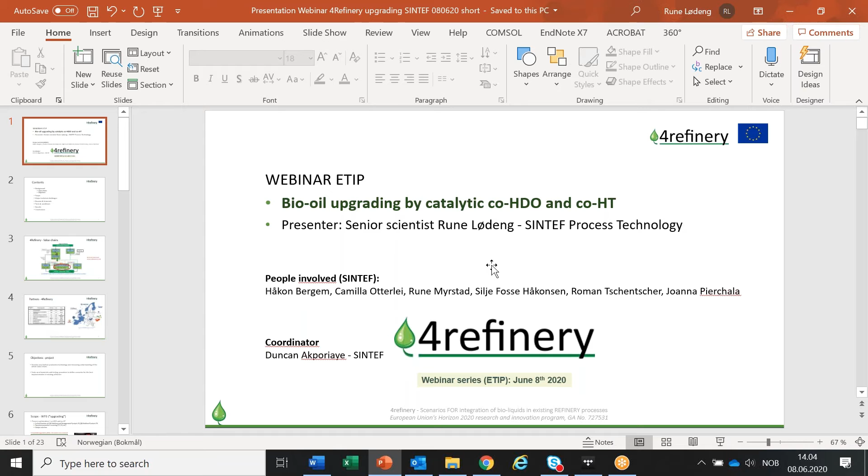The title is Bio-oil upgrading by co-HDO and co-HT. It is to some degree a technical presentation from work performed in the 4Refinery project, which is still ongoing. You see the list of people involved, and this project is coordinated by SINTEF and Duncan Akporiaye. First, a brief outline of the content: some background information, the value chains and project objectives, then the scope of the study, technical challenges, and then some experimental aspects, including results and conclusions.

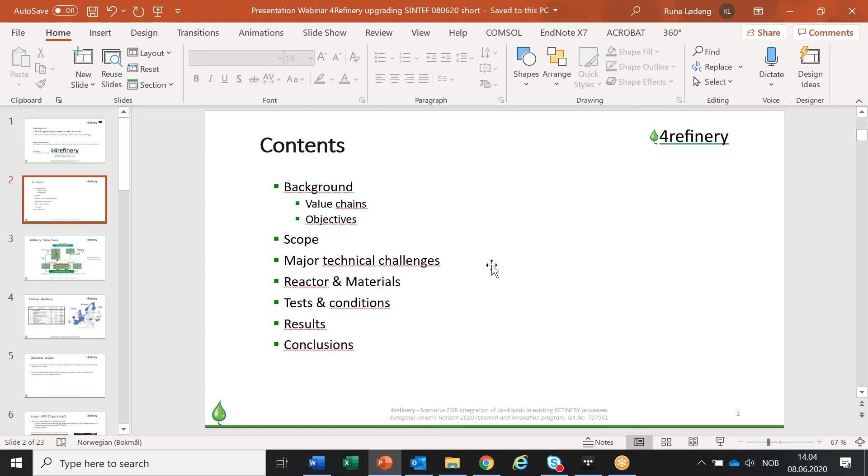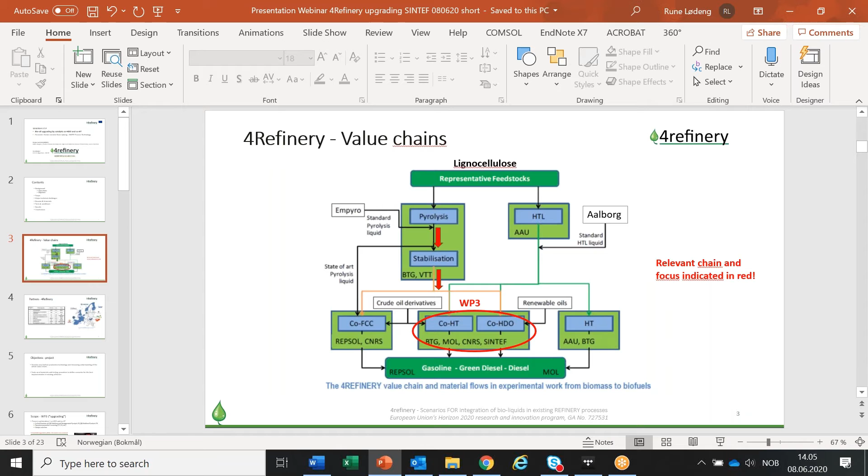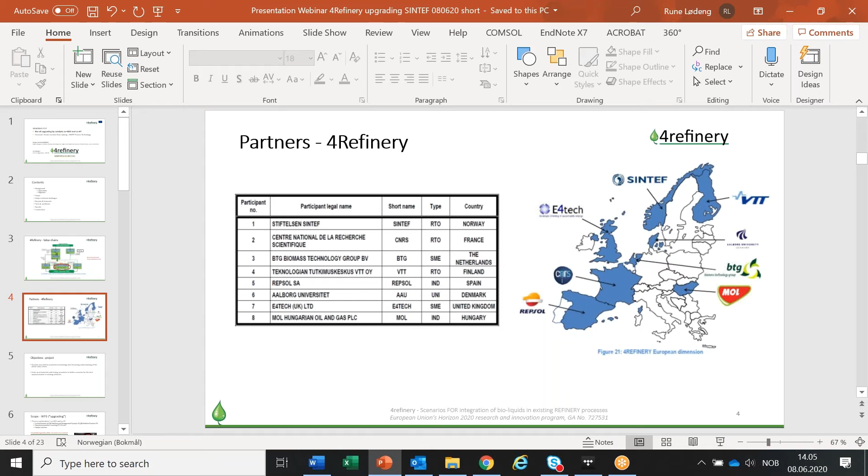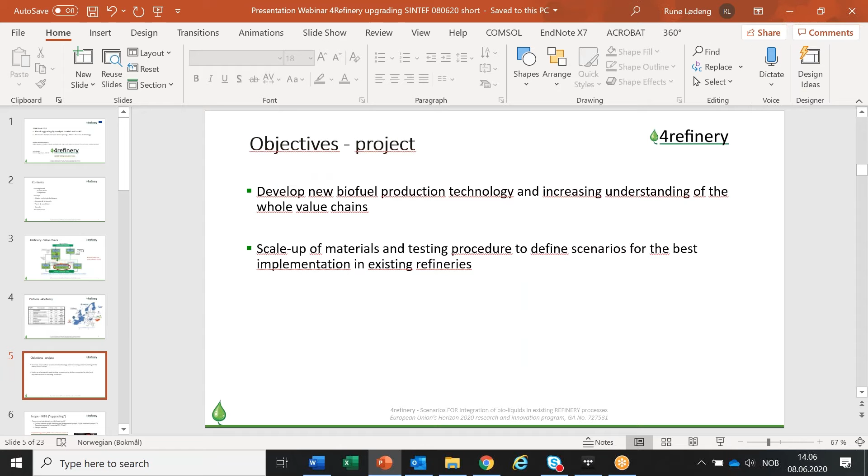Rune, I'm sorry to interrupt you. Could you please turn on the presentation mode, which has been asked by your participants? Yeah, great, thanks.

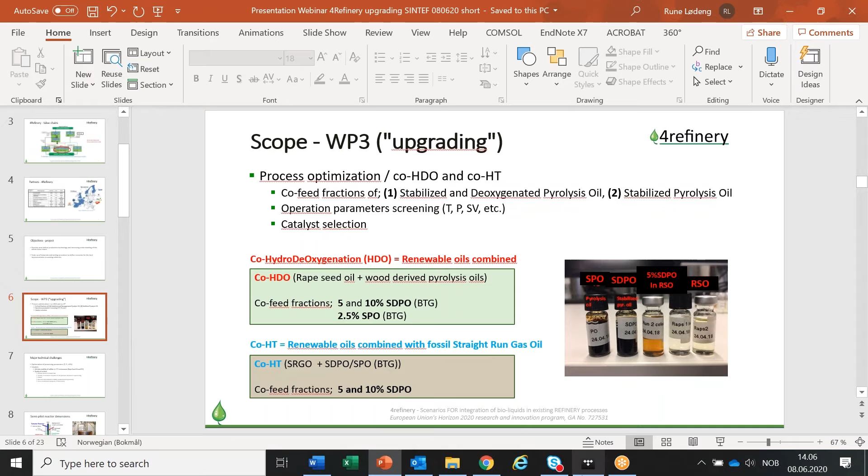The scope of WP3 is upgrading. It's about different aspects of process optimization, fractions of pyrolysis oil, and pyrolysis oil quality. It's about operating parameters, and it's about selecting the best catalyst.

In co-HDO, we study mixtures of renewable oils only: 5 and 10% stabilized and deoxygenated pyrolysis oil, and 2.5% stabilized pyrolysis oil in rapeseed oil. The stabilized and deoxygenated oil is high quality oil, while the stabilized-only oil is lower quality with higher oxygen content. In co-HT, we combine pyrolysis oil with fossil oils at the 5 and 10% levels of SDPO.

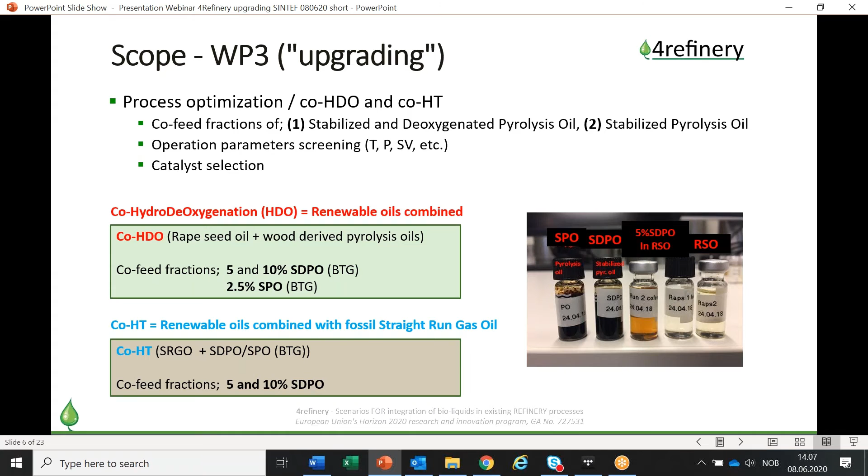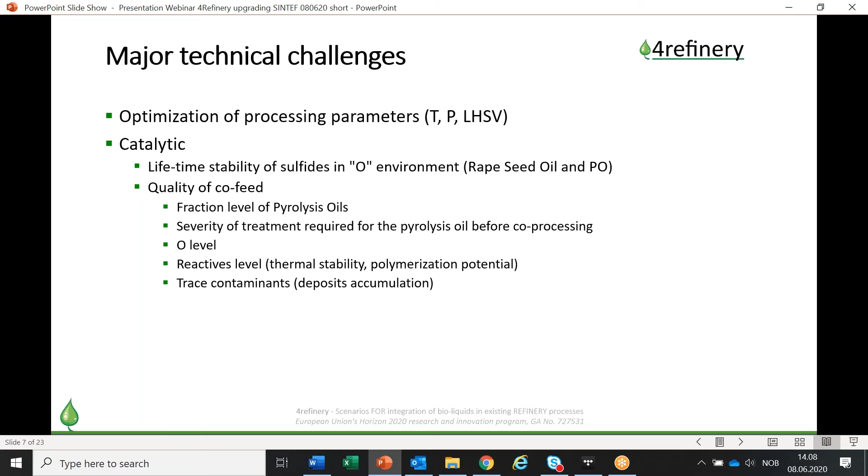The upgrading is studied in a semi-pilot fixed bed reactor. We have used full pellet catalysts in all tests. It is a 1-inch internal diameter reactor, 1 meter long. The catalyst bed is typically 20 centimeters long, and the catalyst is diluted with silicium carbide to handle the heat release better.

We have prepared and studied 2 different types of catalysts, the CoMo on alumina and the NiMo on alumina - conventional materials. I will show results obtained under the NiMo sulfide catalyst, since this had better stability over time than the CoMo. These catalysts are pretreated with dimethyl disulfide to activate them to the sulfide state, and this sulfur component is also added to the feed during the test to maintain the activity of the catalyst.

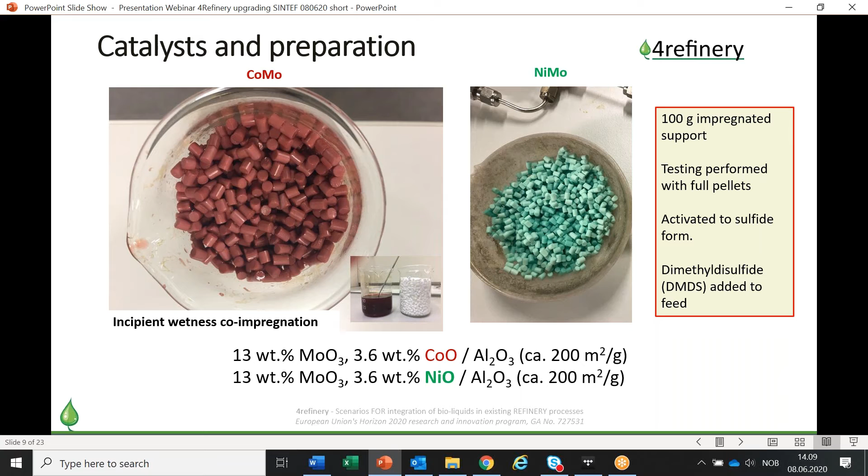Briefly on the analytical methods: we follow the gas composition by online gas chromatography. We calculate the hydrogen consumption. For the liquid products, we measure density, elements composition. We do a boiling point distribution, SIMDIST, and we also do chemical detailing by two-dimensional GCMS. In addition, we follow the temperature and the catalyst bed behavior.

The goal is production of middle distillates, with boiling points typically located between 150 and 360 degrees C. These graphs show the SIMDIST fingerprint of the feed oils. To the left, you see the fossil oils. They are largely inside the middle distillate range.

The renewable oils in the right figure have a small fraction below 150 degrees C and a 20% fraction above 360 degrees C. And you also see from the right figure that the SPO is heavier than the more treated SDPO.

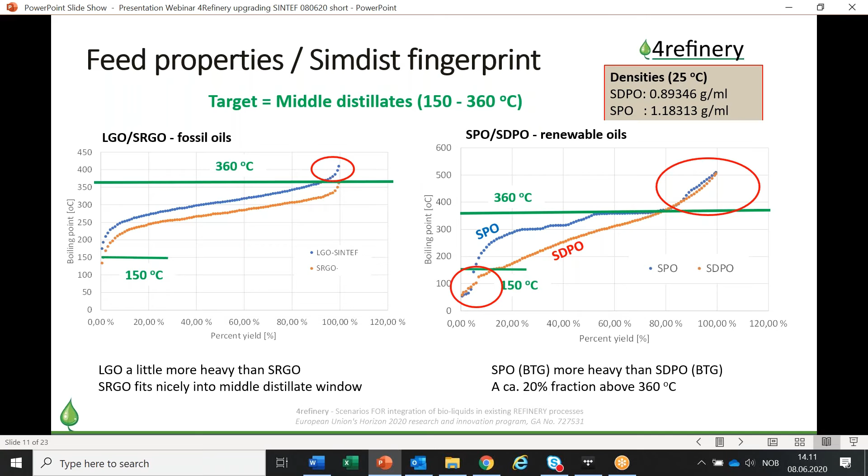A challenge for processing is the highly exothermal reaction. These profiles illustrate the difference of ordinary HDS, that is not so highly exothermal, compared to hydrodeoxygenation of rapeseed oil. Rapeseed oil contains 11 weight % oxygen, so it's a rather high heat release. The HDO reaction is fast, and when performed at high conversion, much heat is released. As a consequence, it is more difficult to control the reactor temperature in case of this high oxygen feedstock.

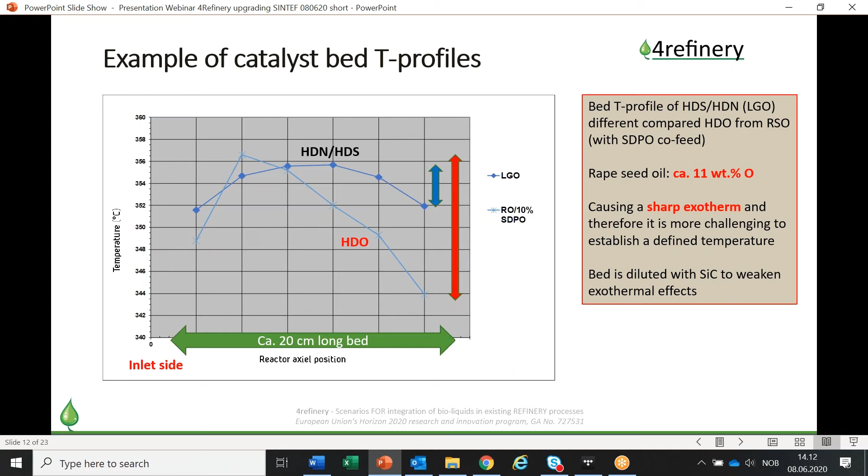Then some results. I'm not going into detail in this table, but each line refers to 1 day on stream, so you see it's approximately 16 days on stream. We start the test with a fossil oil period, LGO, as a reference to see that things work nicely. Then this is followed by multiple rapeseed oil periods with variations in temperature, pressure, and so on. Then we switch to the co-feed that you see in lines 13 and 14, and then thereafter back again to LGO and rapeseed oil.

The table shows via the density of the products obtained and via the remaining oxygen that the conditions give near complete HDO conversion between 99 and 100%. We also see via the HDS and HDN removal in these reference oil periods, that is the numbers in the red circles, that there is a slight activity decay over time, and that is one major challenge. The catalyst is not performing at the conventional level regarding lifetime stability. It's a slight decay to be observed over 16 days.

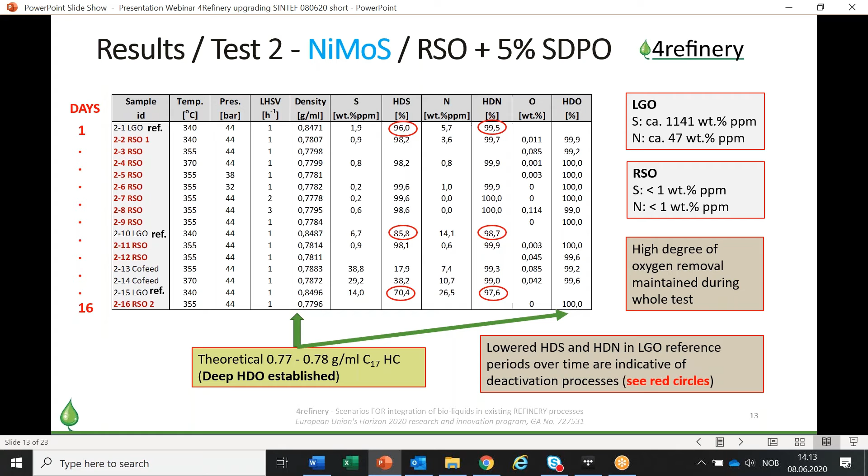Then light gases are formed. These are dominated, when you look at the red boxes, by propane and CO2 and carbon monoxide, but also other hydrocarbons. CO2 in this context is a loss. Carbon monoxide as well, but it is in addition a potential catalyst poison. C3 is value, and propane and the other hydrocarbons could be converted to, for example, hydrogen needed for the processing.

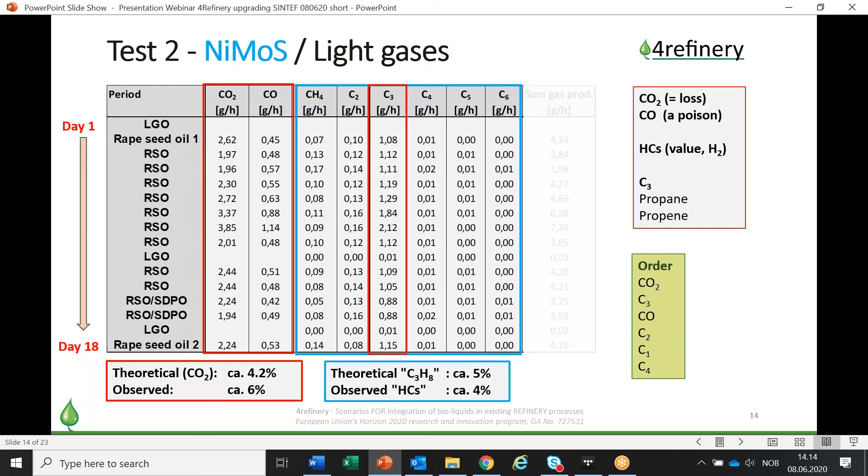The product liquid composition from rapeseed oil over time is shown here. This is dominated by linear C17 and C18 hydrocarbons, and these two constitute above 80% of the liquid. In addition, there is some C15 and also some C19 and higher. So the total carbon yield in this system is above 90%.

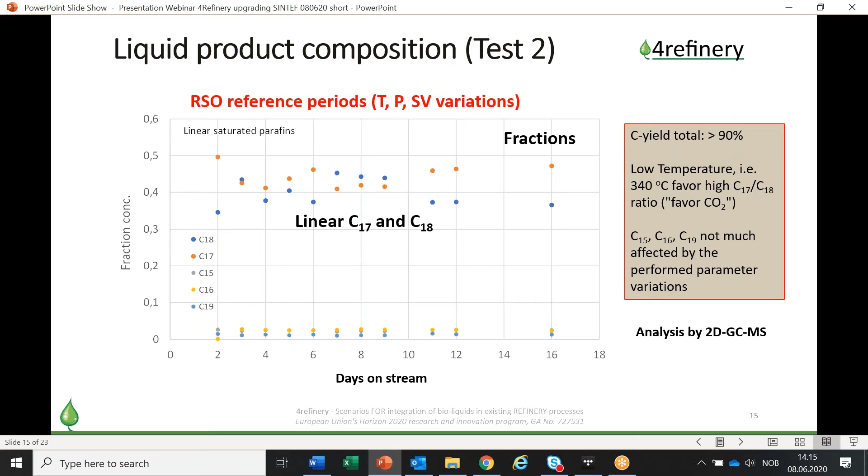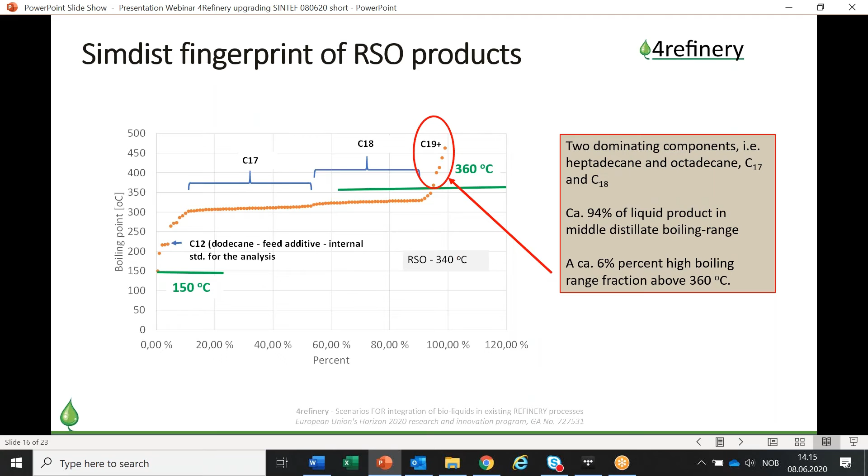Test 3 uses rapeseed oil with co-feeding of 10% SDPO and also 2.5% stabilized pyrolysis oil. It's an approximately 12-day long test, and we see again from the density and oxygen measurements that near complete conversion is reached. So the technical feasibility of doing this co-processing is demonstrated.

Technically, there were no special issues for the 10% SDPO and the 2.5% SPO, but when we increased the SPO level to 5%, we started experiencing some pump instability issues. That was at the 5% level.

Then to co-hydrotreating. This is the boiling point distribution of the co-feed mixture compared with the straight run gas oil, straight run gas oil in red, mixture in blue. The SDPO fraction causes a slight shift in the boiling point at both ends - a little more light fraction and a little more heavy fraction outside the middle distillate boiling window. It's a question of a few percent in total only.

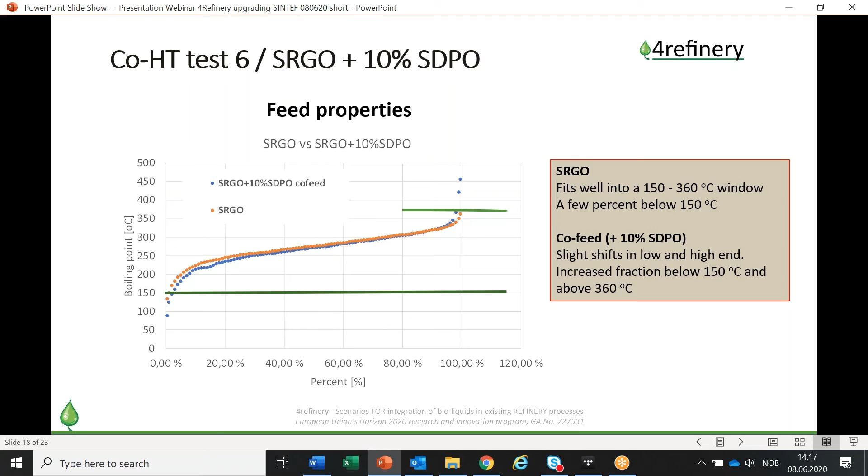Another way of addressing time changes is via gravimetric density. This shows the density of the liquid along the timeline of the test. When we feed straight run gas oil only, there's a tendency for density to increase, but when we step to the co-feed including 10% SDPO, it might be that the tendency to increase is a little higher. It's not easy to evaluate, but there is an increase going on.

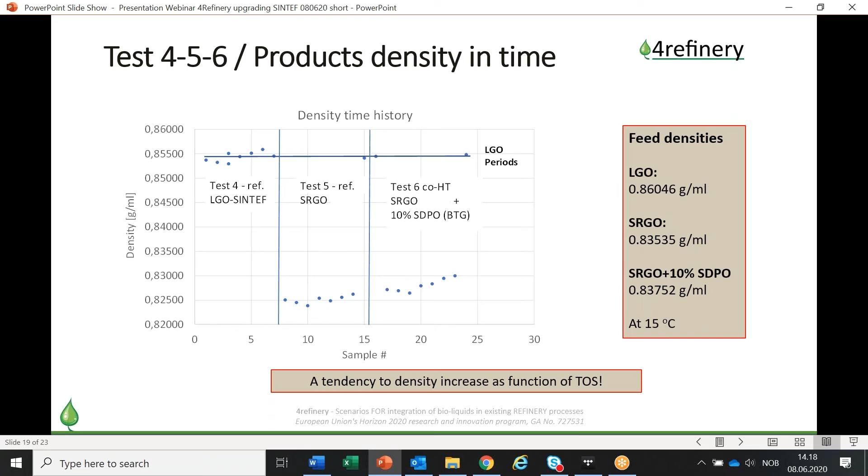Then some hydrogen consumption estimates. Rapeseed oil as a reference has a very high level of oxygen, 11 weight percent, and the hydrogen consumption is in the range of 200 to 250 normal liter per liter oil. When we add the 10% SDPO, we are not able to measure any difference actually, because this SDPO also contains about 2% oxygen. This is removed, and in addition some hydrogen is used for saturation of other components, so all in all it's not a big change.

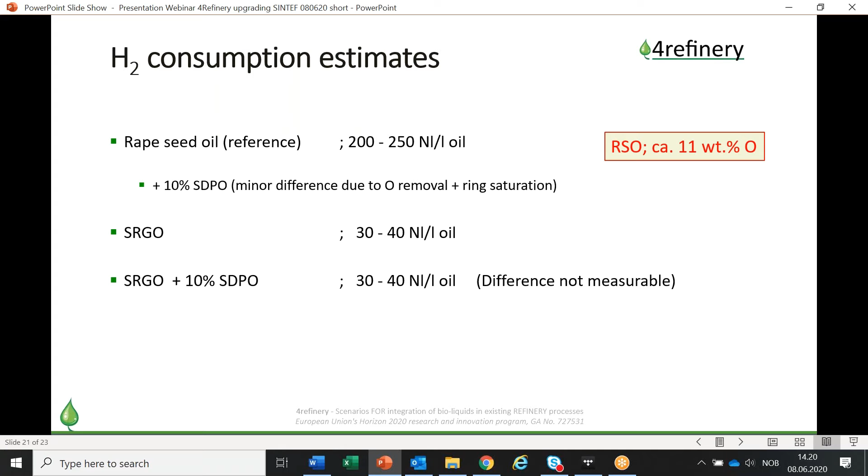For the fossil oil only, straight run gas oil, the hydrogen consumption is in the range of 30 to 40 normal liter per liter oil, which is 8 times lower. And for the straight run gas oil with SDPO, we are not able to measure the difference - it's in the same range.

Then I will conclude. The technical feasibility of co-HDO and co-HT has been demonstrated in semi-pilot scale with full pellet catalysts. We obtain a high yield of linear C17 and C18 from rapeseed oil.

The major chemistry from the co-HDO is that oxygen is deeply removed. The aromatics of the pyrolysis oil are converted to cyclic saturates. We have seen that the NiMoS is more promising than the CoMoS, and we believe that is due to better carbon monoxide tolerance. But as I have shown, we see a slow activity decay over 18 days.

It's not clear if this is stabilizing or progressing further. Regarding processing conditions, we think higher pressure than 44 bars will be beneficial to lower olefins and likely also CO2, which is a loss.

Regarding the levels, the fractions, SDPO at 10% level is promising. It works well, and robustness to even higher fractions is likely. It is oil quality dependent though. A small fraction of 2.5% of the SPO is okay.

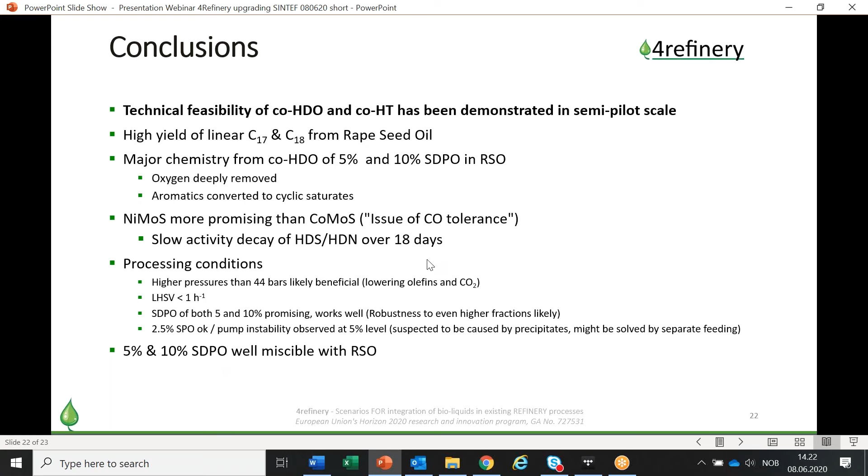Thank you, Rune, for your contribution. This is very interesting, and really hot off the press is my impression of the results you're presenting. Work is still ongoing in the 4refinery project.

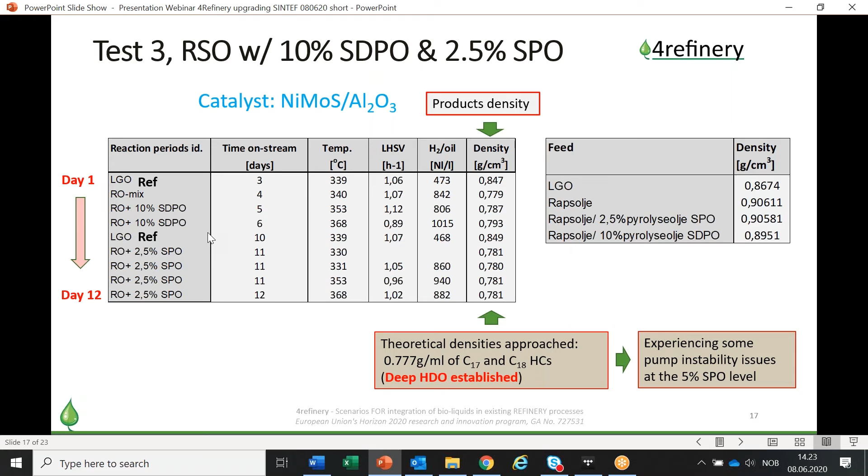Can you hear me? Yes, good. Very good presentation. I'm curious to know how you check the miscibility of the pyrolysis oil with the rapeseed oil, and which technique you use exactly. We just do it in glass beakers beforehand to see that it mixes well, by visual inspection. When you use stabilized pyrolysis oil, you will see that solid materials form once you go over a certain level. We have used pre-mixed feed, so I think the flexibility of feeding will increase if you do separate feeding of the different oils. There's also some risk that if these oils stand as a premix for a long time, you can get some precipitate.

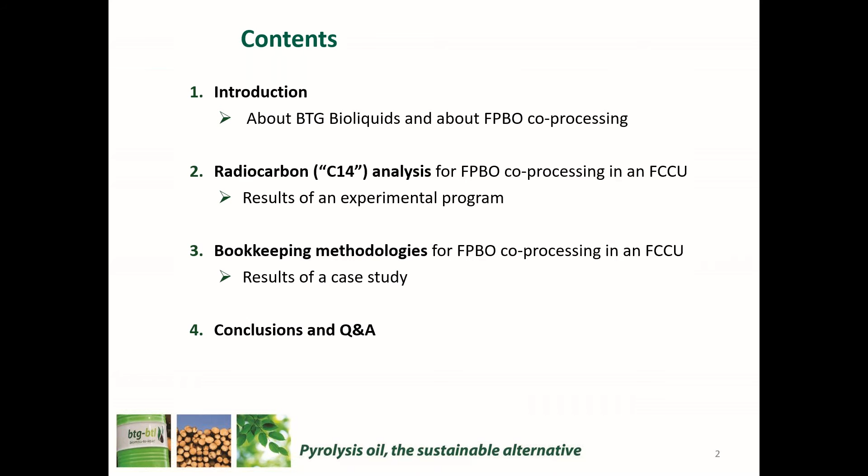About BTG and BTG Bioliquids, very briefly, because there's always confusion between the two. BTG Bioliquids, where I work, is a different company than BTG Biomass Technology Group, for which John works. We are essentially a spin-off of BTG about 10 years ago, in order to commercialize the fast pyrolysis technology developed by BTG. We currently have 10 employees. We built the fast pyrolysis plant Empyro in Hengelo, and we are currently constructing 2 more pyrolysis plants, one for Sweden and one for Finland.

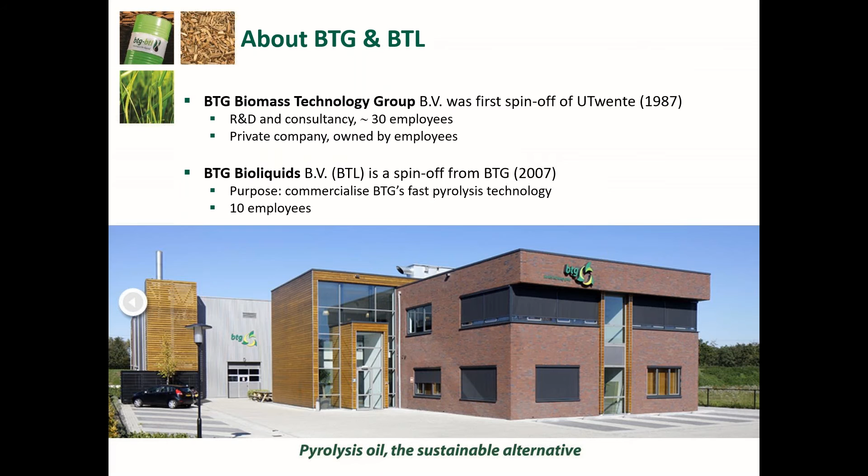About fast pyrolysis, I'll go through this quickly since I assume most of the audience knows this, but it's the thermal cracking of organic material in the absence of oxygen. What's most important when you talk about advanced biofuels is that the typical feedstocks we use for fast pyrolysis are lignocellulosic feedstocks like sawdust, etc. These are the feedstocks listed, for example, in the Renewable Energy Directive, the famous Annex 9A feedstocks.

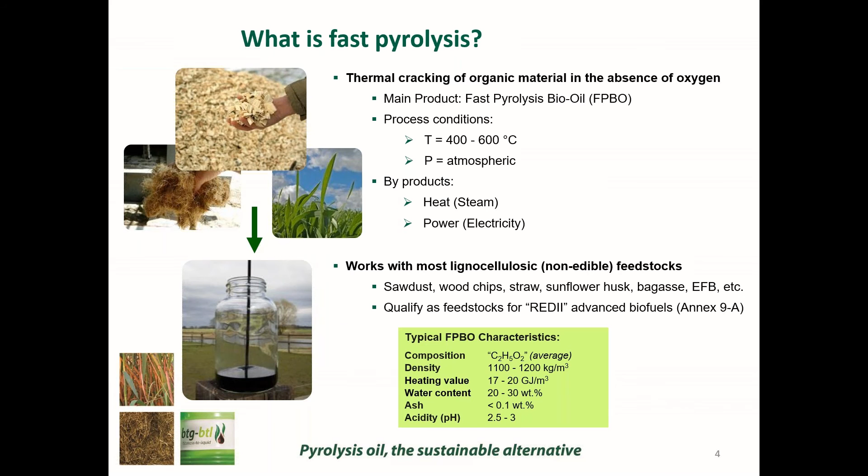So I will focus on the first part: co-processing crude fast pyrolysis bio-oil in an FCC unit in an oil refinery. In essence, what you do is use existing infrastructure, which means relatively low capex and production costs, and a short time to market. You can quickly implement this route and achieve a greenhouse gas reduction in fuels in the short term because of that.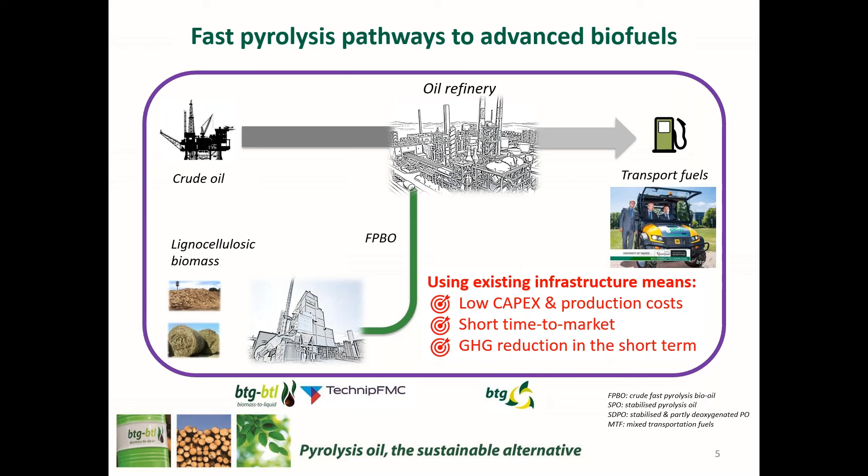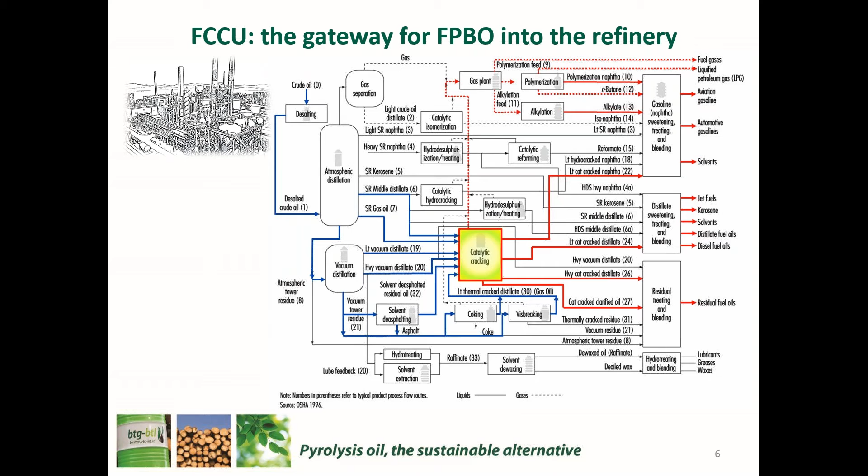Here you see an overview of a typical complex refinery. I don't want to go into too much detail, but I want to show that the catalytic cracking unit, the FCC, is typically the heart of a refinery. It can take on a lot of different feedstocks from different units, of different quality, etc., and it produces a whole range of different products. Because it can take so many different feedstocks, it's also the ideal unit to introduce pyrolysis oil, which is a very oxygen-rich feedstock, into a refinery, because it's actually able to handle it.

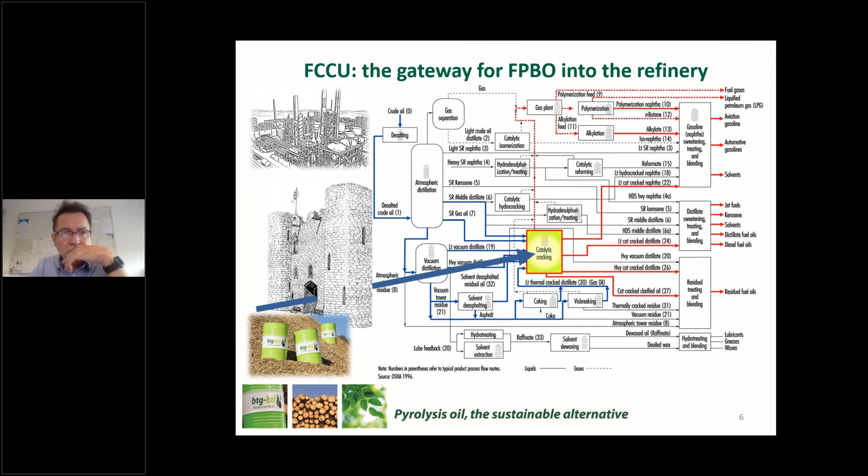The fact that it produces a lot of different products, which may end up in a lot of different fuels and other products of a refinery, is a bit of a problem when it comes to tracing the biocarbon, but I'll get back to that shortly.

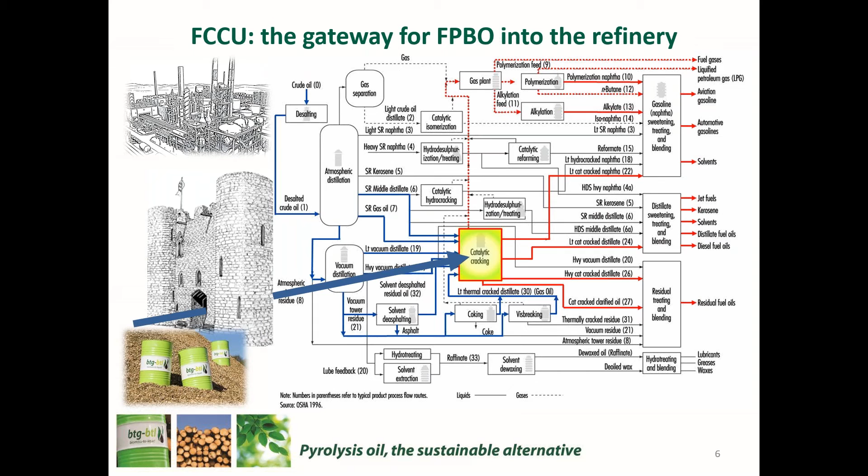When you talk about refinery co-processing of pyrolysis oil, here are some numbers. A typical FCC unit of a European refinery is about 40 to 50,000 barrels per day. If you co-process 5 weight percent pyrolysis oil, you end up with roughly 2 weight percent advanced biofuels. To do that, you need about 460 tons per day of pyrolysis oil, which translates to 6 decentral fast pyrolysis plants the size of Empyro, or the 2 plants we are currently building in Scandinavia. So that gives an idea of scale - roughly for every weight percent you want to co-process in an FCC unit, you need 1 pyrolysis plant. So there is quite a significant scale difference there.

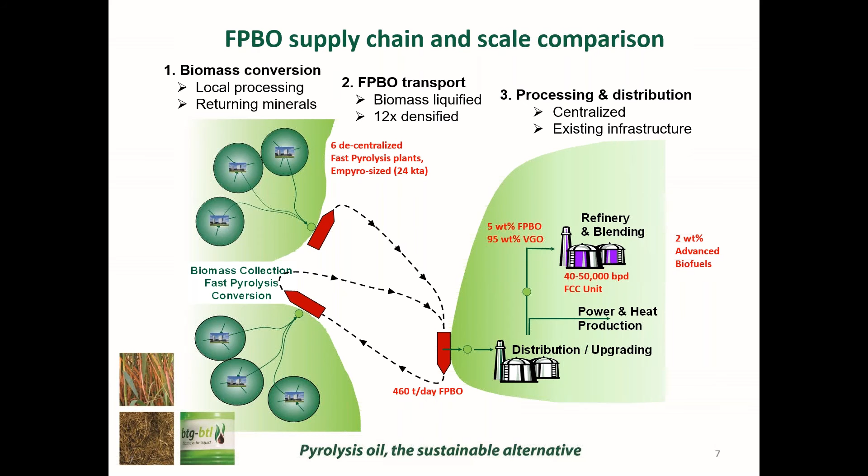What you do when you co-process pyrolysis oil is you just add the pyrolysis oil as a separate feed into the unit, and it's cracked together with your regular petroleum feed to produce these same products. This means that the green carbon you introduce is distributed across all the different products that you produce.

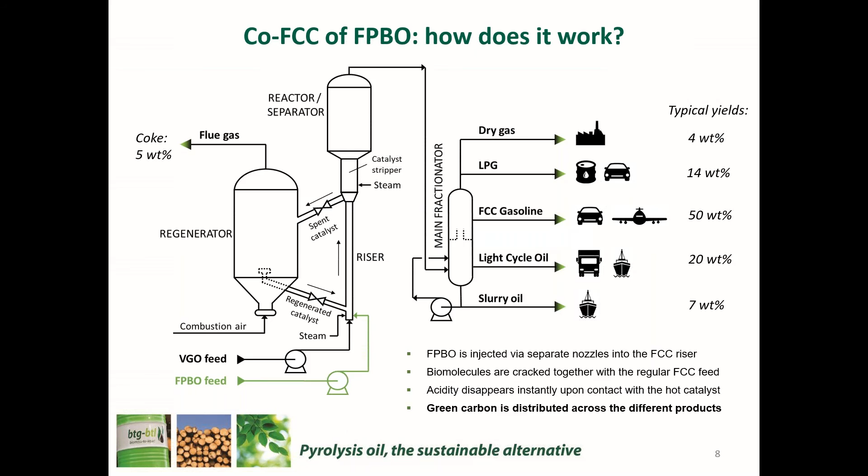And that brings me to the main question for my presentation today: how to trace the biogenic carbon. Currently, if you look at supply chains for biochemicals and biofuels, it's fairly easy and well established when you talk about products with a high percentage of biogenic carbon. Also, when you talk about co-processing vegetable oils in hydrotreaters to produce HVO, it's well established how to trace the biogenic carbon. There's a whole certification system for such pathways, for example by the ISCC, which relies on either radiocarbon, C14 determination, or bookkeeping methods like mass or energy balances.

However, when you talk about pyrolysis oil, I believe the combination of challenges is relatively unique compared to other scenarios. There's a scale difference of about 1 to 100 between a pyrolysis plant and an FCC unit. When you co-process crude pyrolysis oil, you're limited to roughly 5 weight percent without introducing major technical changes to your FCC unit, and the green carbon is distributed across many refinery products. So on one hand you have dilution of your biogenic carbon by scale, and on the other hand dilution because it's distributed among many different products.

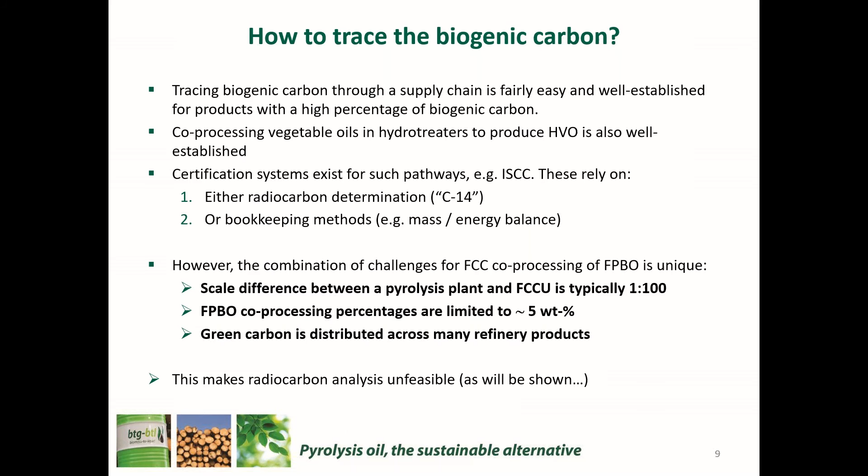So, about radiocarbon analysis for co-processing pyrolysis oil - first, what's known already? In 2017 Petrobras published some data. They did large-scale pilot plant trials of pyrolysis oil co-processing in their FCC unit, and also did radiocarbon analysis of the products. What they showed is that if you use 5% bio-oil in the feed, you get about 1 weight percent biogenic carbon in your liquid product, and it increases roughly linearly with 10, 20, and higher percentages.

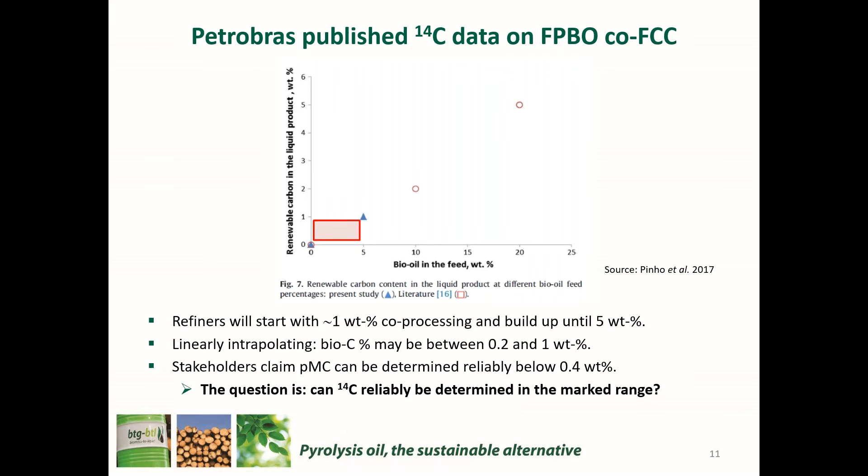I'll skip ahead in view of time straight to the results - we published a paper on it recently, and I'll send a link so you can find all the details. In essence, we used samples from Petrobras trials from the same pilot plant, diluted them to known concentrations, and submitted them for analysis by C14 using AMS, accelerator mass spectrometry, which is the most accurate and precise method that exists for radiocarbon analysis - and the most expensive, by the way.

What you see here is a graph with a lot of points, blue and orange, which are the samples, with error bars indicating the error margins from the lab. That should show the error margin is fairly small and the results are reliable. But as you can see, if you draw a line through them, it should be linear, yet there's really a lot of data scatter. I think you can conclude that in this marked range, there's really a lot of uncertainty in this method.

If you translate this radiocarbon analysis into a biogenic carbon analysis, that's what you see on the graph on the right. The ASTM standard that exists for doing this analysis prescribes that you need to take an error margin of 3%.

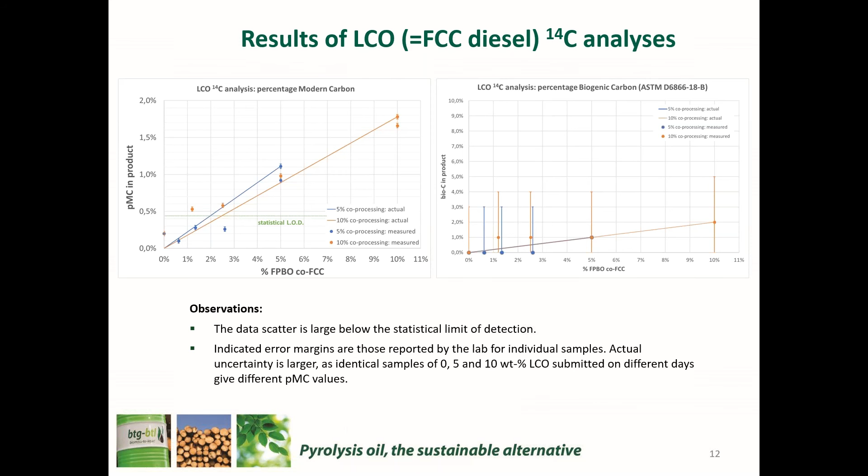One of the reasons, going into a bit more detail, for ASTM to introduce such high error margins is what they call the atmospheric adjustment factor.

C14 is created by radioactive radiation in the atmosphere, coming from the sun, but also from, for example, atom bomb testing in the past century. Those things really influence the amount of radiocarbon in the atmosphere, and thus the amount of radiocarbon in your trees, for example, if you make your pyrolysis oil from sawdust, as in our case. That really influences the amount of biocarbon that in the end you determine.

And this graph shows that for all our samples, we were 15% too high in measured biocarbon content compared to the actual data. This really shows that there's a structural difference that depends on your feedstock.

So if you use an agricultural residue like straw, you will get different numbers than when you use sawdust from trees from Scandinavia, which will give different results than when you would use sawdust from trees from the United States, for example. So there's really an error margin introduced in this way as well.

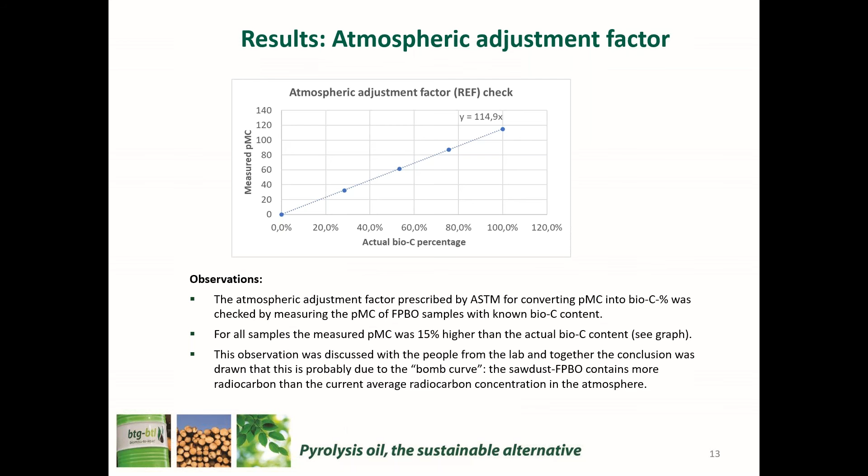This brings me to my conclusions on radiocarbon analysis for this presentation. We started with gasoline, LCO or FCC diesel, and total liquid product samples. I showed only the results from the LCO; you can see the other results in our paper. We analyzed them for biogenic content.

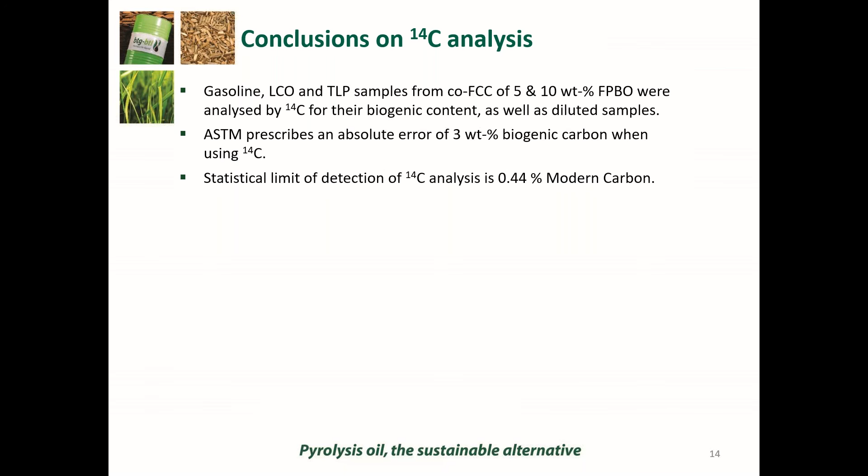Knowing that ASTM prescribes an absolute error margin of 3 weight percent biogenic carbon, and that the statistical limit of detection is 0.4% of C14, the goal was to assess the suitability of this analysis for determining the biogenic content when you co-process small amounts of pyrolysis oil.

What we observed was that there's really significant deviations and a large data scatter. Also, the atmospheric adjustment factor as prescribed by ASTM, in this case 1.0, doesn't match the actual C14 that was in the products, probably because of this atom bomb effect I was referring to.

So we believe that when you co-process such small amounts of pyrolysis oil in a commercial situation, you really cannot rely on C14 analysis to do this kind of biogenic carbon determination. That means you need to do something else, which brings me to the next part of this presentation: the bookkeeping methods you can use to do this.

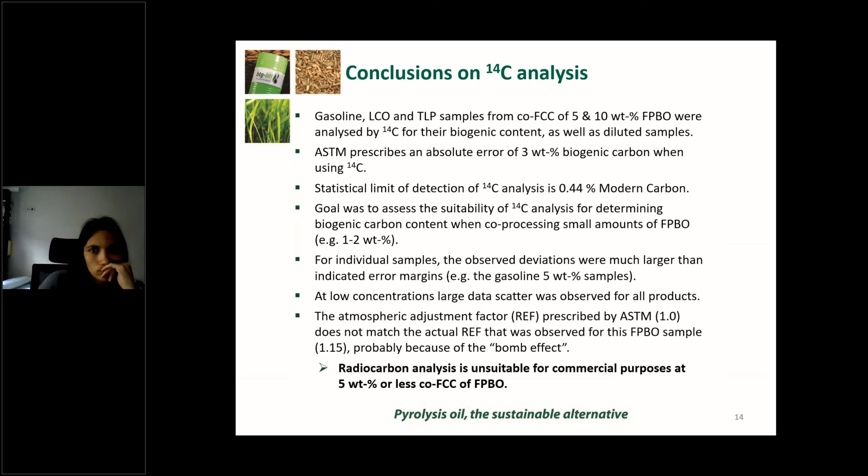What we did is a case study based on, for transparency's sake, published data in literature by Petrobras, again using their unit. The yields I used are shown here in this graph, so different products made if you co-process 100% VGO or if you would co-process 5% pyrolysis oil with it.

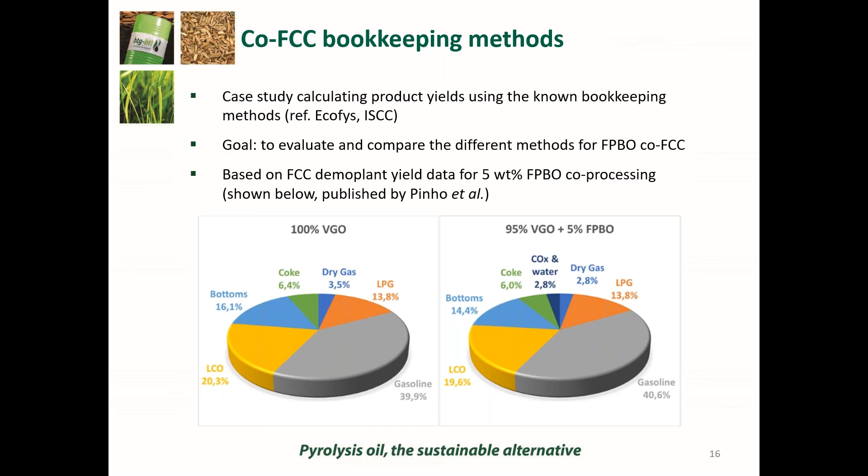The goal was to evaluate and compare the different methods that exist for pyrolysis oil co-processing. We evaluated 5 different methods: one based on observed yields, a carbon mass balance, a total mass balance method, an energy balance method, and a free attribution method.

The first one, the observed yields, really looks at what happens. So you have a baseline with only your VGO, and you look at how the yields change, and we attribute these changes to biofuel production, so to the co-processing.

Then there's the carbon and total mass balances, which calculate the yields based on the input—in the case of the carbon mass balance, on the biocarbon input, and in case of the total mass balance, on the total biomass input. These methods say that when you do biomass co-processing, you introduce oxygen, which will be released partly in CO, CO2, and water. So these products we subtract from the amount of biomass actually put in, as a way to compensate for the oxygen, which will lead to less biofuel production than the actual mass you are putting in.

Then there's an energy balance method, which is similar, but calculated on the basis of energy content of the biomass or pyrolysis oil input and all the products that go out. And there's a free attribution method, common for the chemical industry but not so much for biofuels production, where as an economic operator you freely attribute the biomass you put into your system to a certain product or multiple products that you want to get credits from, for example.

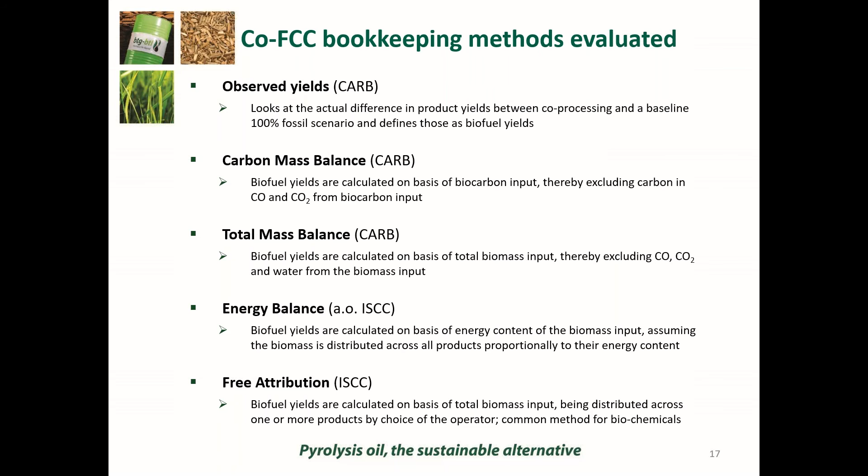If you then calculate the total biofuels yield, in this case LPG, gasoline, LCO, and fuel oil added together, you get a yield of about 56% biofuels from your pyrolysis oil.

This is a bit of an overestimation, I believe personally, because of these negative yields. It would be fairer to subtract them from the positive yields, because you cannot produce negative yields from a certain product. So when you really talk about biogenic carbon determination and where the biocarbon is actually going, you need to adapt your method for this effect.

Which you can do by subtracting the negative yields of dry gas, fuel oil, and coke that I just showed, from the positive yields, and then you get more reliable yields of the LPG, gasoline, and LCO. Then you talk about a total biofuels yield of about 44%.

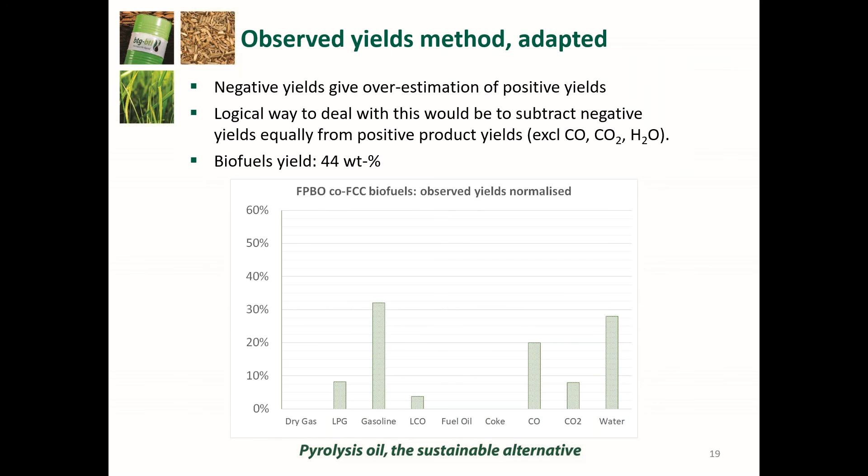Another way you could do this is an energy balance method, where you distribute the renewable input across all the products based on the energy content of the feedstocks and the products. The losses to CO, CO2, and water are automatically incorporated here, because they don't have an energy content, so they don't give you anything.

If you do this calculation, looking again at the LPG, gasoline, LCO, and fuel oil produced, the total yield is 36%. The only difference from the previous method is that you now produce a positive amount of fuel oil, coke, and dry gas, which comes at the expense of the LPG, gasoline, and LCO production.

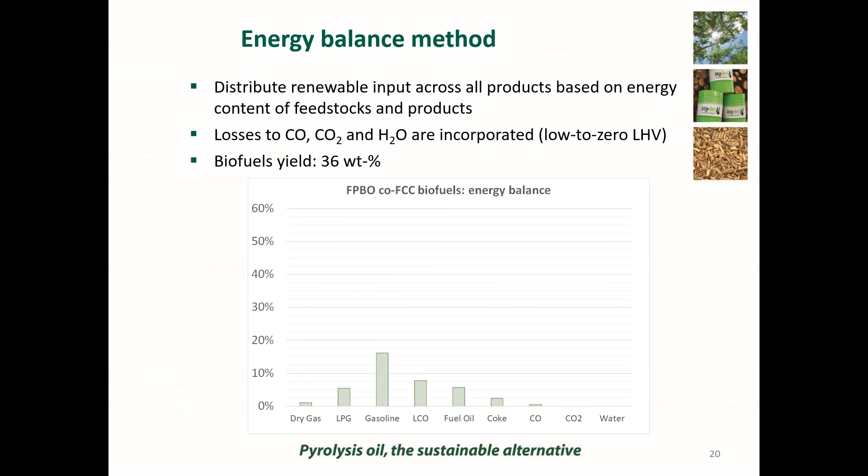Then this is an overview of all the methods that we analyzed. It shows that if you look at the total yields, it's all between 400 and 500 kilograms of biofuel of total products from one ton of pyrolysis oil. So it's in the same range, but you see some differences.

What I showed is that if you use the observed yield method, there's no dry gas, no fuel oil, and no coke, so you have more LPG, gasoline, and LCO—that's the blue bars—compared to energy and mass balance methods, the orange and green ones. And if you do a free attribution, you can choose where this gray bar is. For the sake of an example here, I picked between gasoline and diesel as 50-50.

Which brings me to the conclusions of this part, and that is that if you use an observed yields method, it gives you both positive and negative yields.

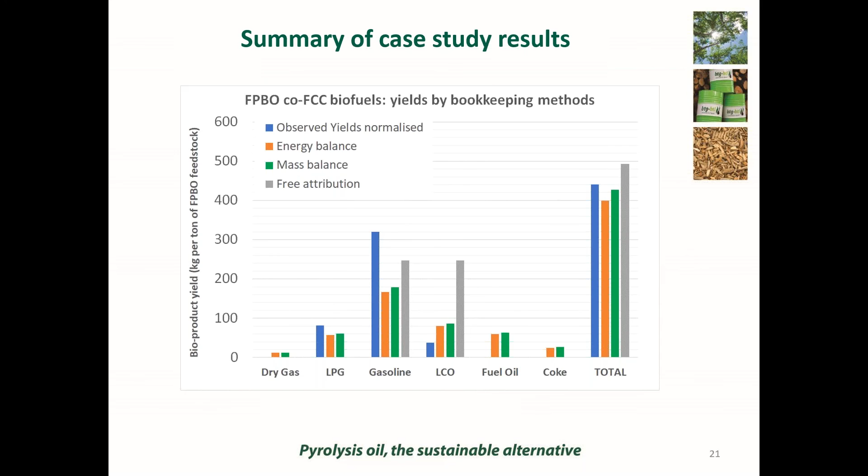The current method as it exists doesn't really account for this, so therefore we adapted it in order to avoid an overestimation of biofuel yields.

We have the carbon mass, total mass, and energy balance methods. They showed slightly different results, which I haven't shown in this presentation, but you can read that back in the paper. This is probably due to some inaccuracies in the oxygen balance of the experiments in the paper we based this on, and also because we had to estimate the energy content of all the different products, which weren't published in this paper, so there may be some inaccuracies there as well.

From these three, the energy balance method gave the lowest yields, but it's in the same range. We believe an energy balance method is going to be the easiest for refiners to implement, and with that also the most reliable.

Free attribution is of course a very straightforward and easy to implement method. However, it's prone to strong criticism by stakeholders, so it's a question whether it would be a feasible method to use for biofuels.

My conclusion, based on what I've shown, is that the observed yields method in its adapted form, and the energy balance method, are really the most suitable bookkeeping methods for FCC co-processing of pyrolysis oil at small percentages, below 5 wt%.

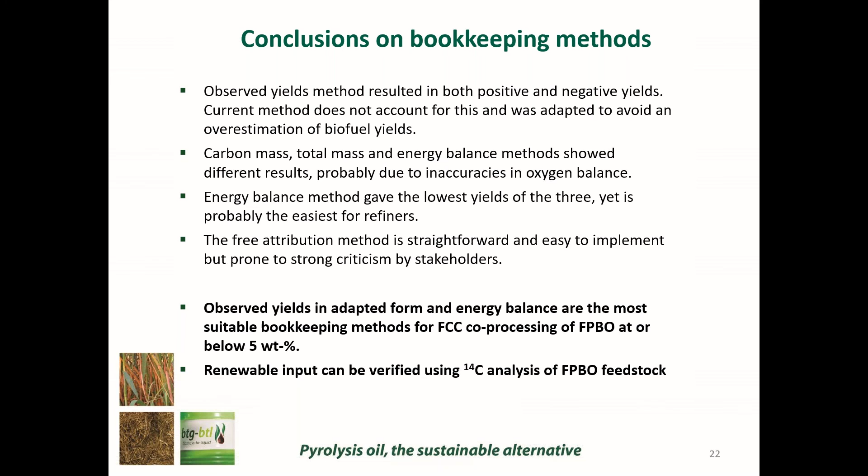Now the overall conclusions. Co-processing pyrolysis oil in FCC units uses existing infrastructure. It has a lot of potential as a pathway to advanced biofuels because of the low capex and production costs and the short time to market. That also means you can achieve significant greenhouse gas emission reductions on the short term, which is needed for the European climate goals.

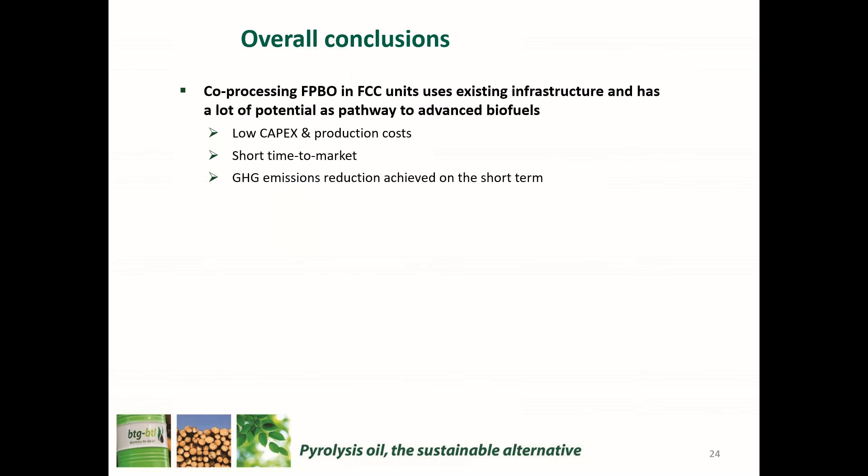Biogenic carbon tracing is particularly challenging for this pathway because of the scale difference and co-processing percentages, and because the green carbon is distributed across many different products. So radiocarbon analysis is really unfeasible for commercial purposes. We show that with the experimental data that I showed.

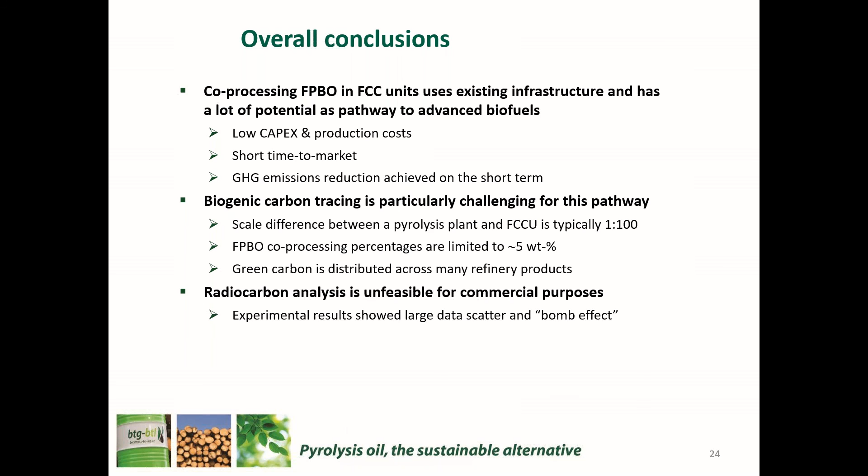Bookkeeping methods are appropriate for this pathway, and especially we believe the observed yields method in its modified form and the energy balance method are the most suitable methods. Then, in order to verify the biocarbon content throughout the entire supply chain, you can still verify the renewable input you put into your refinery with radiocarbon analysis.

That was it for my presentation today. I believe these slides will probably be shared.

Thank you, John, for this introduction, and thanks for giving me the opportunity to present today. Of course, also the subject of my presentation is advanced biofuels from pyrolysis oil, and a lot has already been said in the previous presentation, so my presentation will be a little bit shorter than the previous one.

You have seen this picture before, an overview of the refinery and the different options for producing transportation fuels from pyrolysis oil. As mentioned, the green line was presented by Thijs and the blue line by Rune. I will focus on the yellow line, standalone production of advanced biofuels directly from pyrolysis oil, specifically the production of marine biofuels.

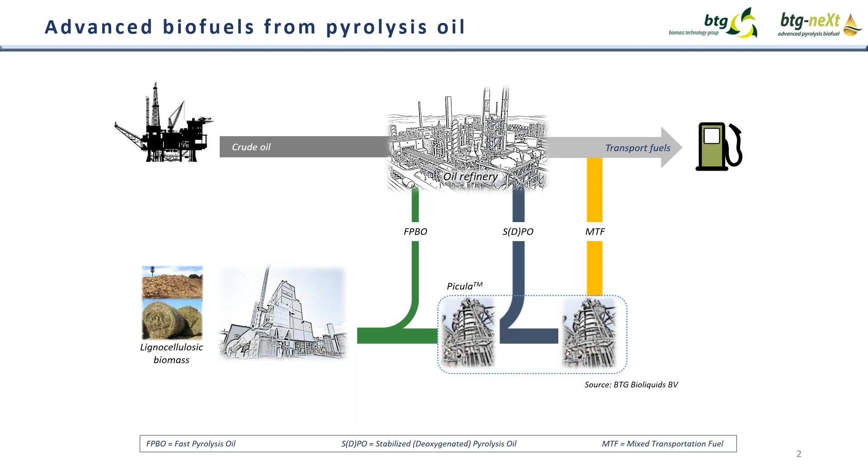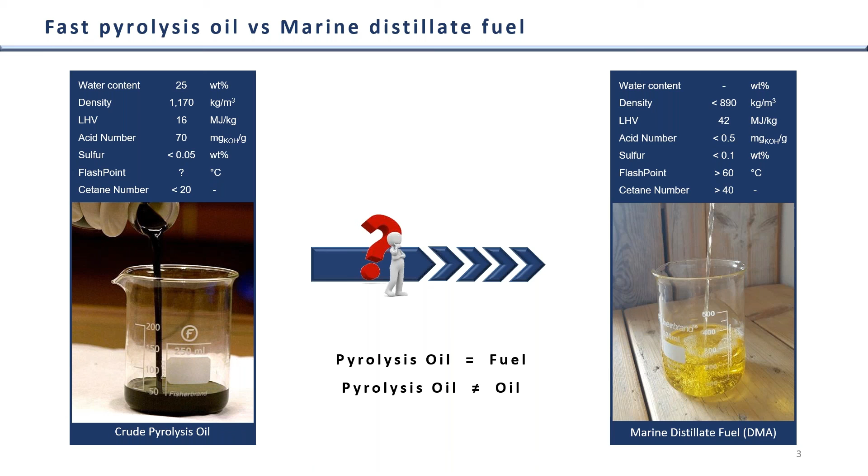Going back a bit, if you look at fast pyrolysis of lignocellulosic biomass, it typically consists of hemicellulose, cellulose, lignin, and extractives. In the fast pyrolysis process, hemicellulose typically leads to acids, ketones, aldehydes. Cellulose is depolymerized to carbohydrates, sugars or sugar fragments. Lignin gives us what we call pyrolytic lignin, mainly the phenolic and aromatic structures from the original lignin, through a kind of depolymerization. Then we have the extractives and rosins, the fatty acids.

They are also present in the pyrolysis liquid, and we have water. In fact, we need a process to convert these components into the marine fuel.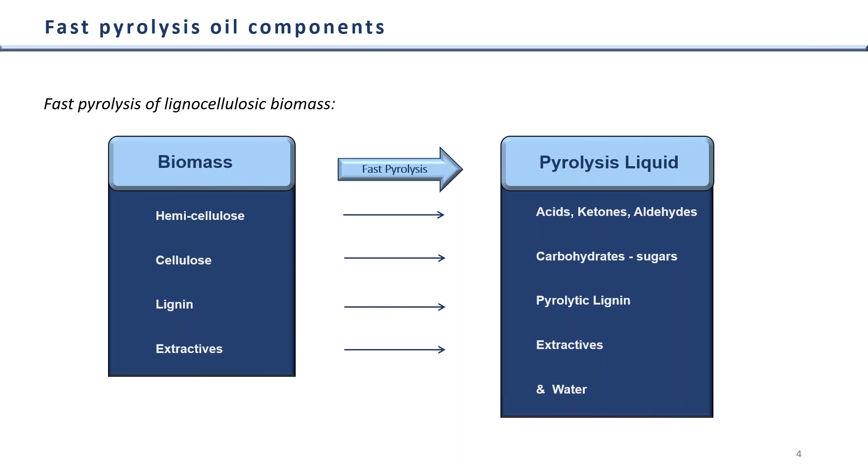So if you go to the process, it was already presented in the previous presentations. You can do a hydro treatment of pyrolysis oil, but you cannot simply replace the feedstock of a conventional hydrotreater by pyrolysis oil - it will not work. What we actually need is a two-step upgrading process, at least 2 steps. The first step is what we call a stabilization, and the stabilization mainly converts the sugars to something which can be used in standard processing. What we do in this first step is more sugar chemistry.

We need a dedicated catalyst - our own proprietary catalyst, which we call Picula. We need a pressure of normally 200 bar, which is quite high. We need a temperature ramping, different temperature ranges within the reactor, starting around 100 degrees, going up to maybe 300 degrees C. The space velocity is somewhere in the range 0.2 to 0.5, and the product from this first step is what we call SPO.

This SPO is sent to the second step, which is more conventional hydrotreatment. We use a standard catalyst, a sulfided NiMo or CoMo, most often sulfided NiMo. The pressure can be a little lower, around 100 to 140 bar. Also in this case we have temperature ramping, starting around 250, going up to 450 - not always necessary, but that's our maximum. The space velocity is also a little higher than for the first step.

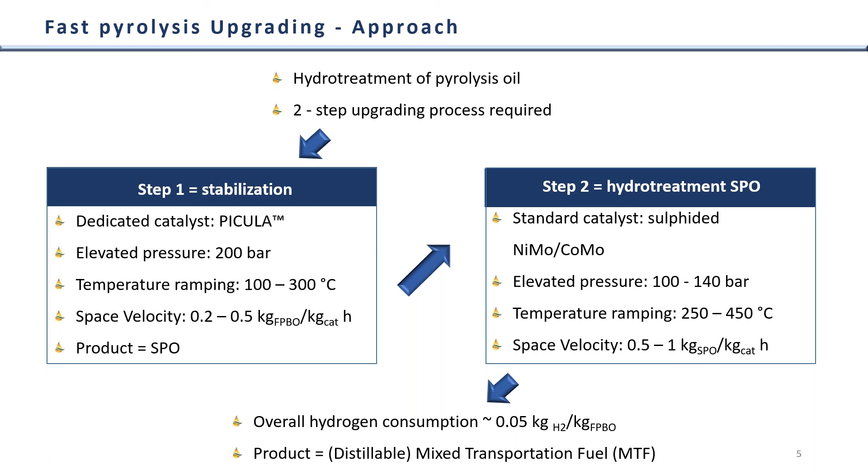We can further illustrate this process in these two graphs. What you see on the left-hand side is the deoxygenation degree, the amount of oxygen removed from the pyrolysis oil, as a function of the hydrogen consumption. And this relation, it's not a linear relation. For instance, initially you start with consuming hydrogen, but you don't see any change in oxygen content.

The explanation is you start with carbohydrates hydrogenation. It means it's taking up hydrogen, but it does not remove any oxygen. And so you can find different reactions, different ongoing reactions as a function of time and temperature and so on.

This first part, the green area, is more where we use this Picula catalyst, and after that we switch to a sulfided NiMo-CoMo. So we have carbohydrate hydrogenation, carbohydrate deoxygenation, and then we also have this dehydration, removing water from the system. You get some olefins and aldehyde hydrogenation, and the final step is this lignin hydrocracking. After these steps, we are close to this 5-8%, a little bit below, of hydrogen consumption, and then it's more or less oxygen free or very low in oxygen, at least below 1%.

The same is also illustrated in the figure on the right-hand side. It's a so-called Van Krevelen plot. The marks you see in both graphs are based on experimental work. At the top, you see this FPBO, the pyrolysis oil. You have some hydrogenation, also of the sugars, you have dehydration, and then deoxygenation cracking. Finally, you end up with a mixed transportation fuel.

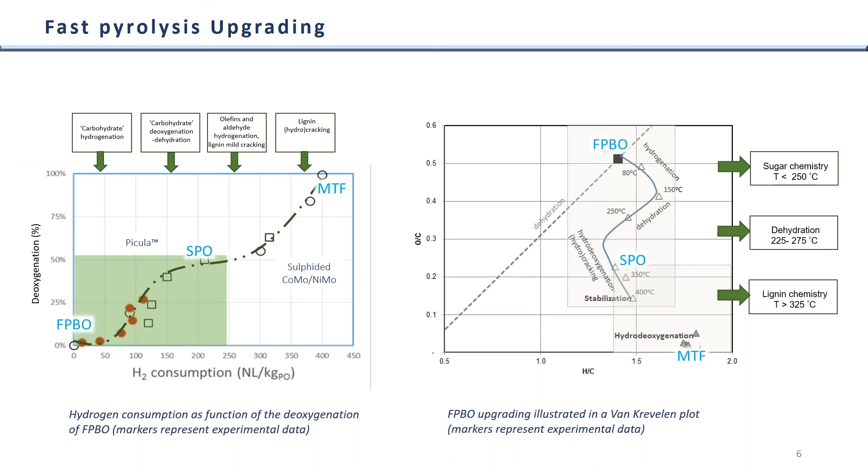You start with fast pyrolysis oil, you feed it to a first reactor filled with the Picula catalyst operating at 200 bar. You add hydrogen, which of course is required, preferably from a renewable source, and is needed in both steps. So the output of the first reactor is the SPO, sent to the second reactor where we have this standard hydrotreating catalyst. Then you get this MTF, what we call the drop-in biofuel.

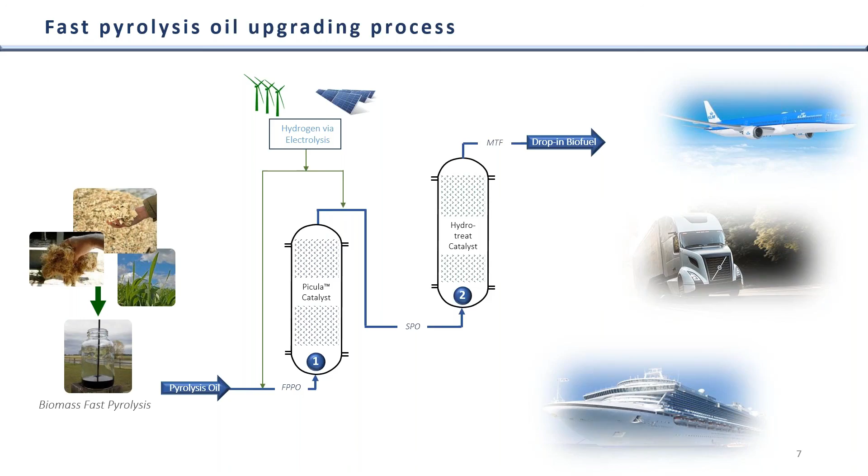What is this drop-in biofuel? It's illustrated on this graph. The left and the right-hand side you have seen before. In the middle now, I added the results from our own experimental work. That's what we call the biofuel, the MTF.

If you look at the water content, at least it's quite low, below 0.1 weight%. Sometimes you can still find some water. The density is now at 870, so below the target. The heating value is at least above 40, and normally we measure 42, 43, somewhere in that range, which is quite good. The acid number has been reduced to below 0.15, and very often it's even much lower.

So acidity almost completely disappeared. Sulfur is not a problem because we also had limited sulfur in the feedstock. Of course, in the second step, we add some sulfur to sulfide the catalyst, but still in the product it's quite low. Flash point 25, that's an issue, I will come back to that. The cetane number we don't know yet.

There is research ongoing with the University of Eindhoven and Good Fuels to determine the combustion properties. There will be some testing also in a small engine, to get a better view on what are the exact combustion properties, because these should also be compatible with existing normal ship engines.

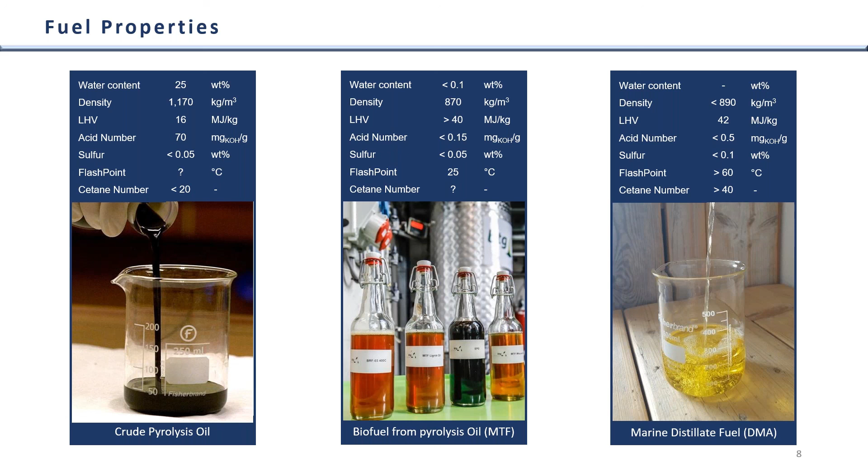As mentioned, this flash point of 25 degrees C is an issue, because flash point is important for storage also on ships, logistics and so on. So we have to do something about this flash point, or we are looking at what to do with this flash point. Well, that's illustrated here.

We are mainly interested in making blends with conventional shipping fuel. So we make a biofuel and mix it with, for instance, distillate marine fuels. What we observed is that it is fully miscible - there's no phase separation, no deposits.

It mixes very well, but the flash point of the MTF is normally in the range of 10 to 30 degrees C, which is quite low. If you add it to a standard fuel, you can only add a little bit before the flash point drops below the minimum, and that's not allowed.

That's illustrated in the graph on the right-hand side, where we plotted the flash point as a function of the biofuel content - a blend of the biofuel, the MTF, and standard diesel. Completely on the right-hand side is 100% biofuel. You see the green dots - this fuel had a flash point of 27, and mixing it with diesel raises it.

Let's say we assumed for a long time the minimum is 55 degrees C for flash point. You can only add some 10% of the complete fuel before reaching the boundary of the flash point.

The low flash point of the biofuel is caused by some lights present in it. So what we tried to do is, by simple flash or simple distillation, remove part of the lights from the fuel. What you see with the blue dots, the blue line, is for a biofuel.

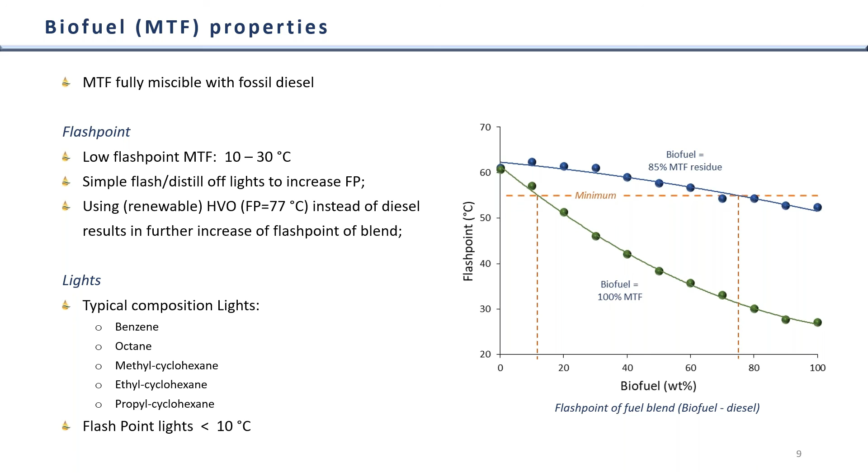So this is about the properties. Now, where are we today, and what is our ambition? That's shown a little bit on this slide. We aim for a demonstration plant in 2023.

So in 3 years' time, we would like to have a demo plant up and running. The demonstration plant should be a kind of pre-commercial plant. Roughly, we are thinking about a capacity of 1,000 tons per year output - that's roughly 20 barrels per day. So it's still pre-commercial, not large enough for commercial operation, but still a significant plant. That's where we want to go.

If you look at the different elements relevant to the realization of such a demonstration plant: fast pyrolysis, as I already mentioned in the previous presentation, is commercial. You can buy it commercially. It is implemented nowadays - there are plants in the Netherlands and in Scandinavia.

Pyrolysis oil is there. I also showed that we can make a drop-in biofuel from fast pyrolysis oil by at least a two-step hydrogenation process. We make something which is already close to the specification of a marine biofuel.

We are still doing research. We have our own hydrotreating pilot plant at BTG, with an input of about 50 kilograms per day, which also gives the possibility to produce some larger quantities to do some engine testing, and that's also something going up.

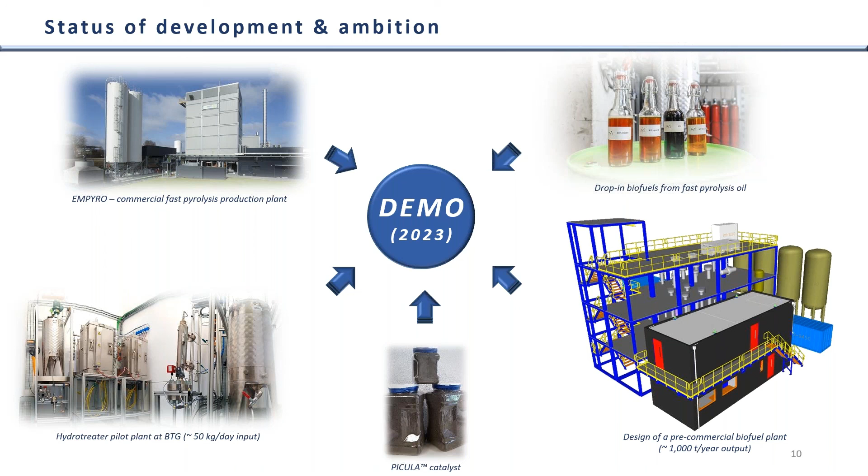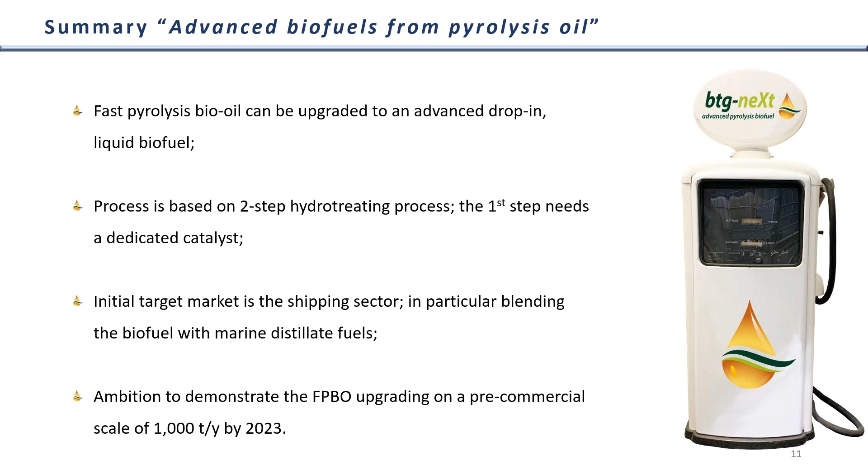Finally, our ambition is to demonstrate this pyrolysis oil upgrading on a pre-commercial scale of, let's say, 1,000 tons per year—that's an estimate—within a 3 year time frame. And that brings me to the end of this presentation. Thank you for your attention.